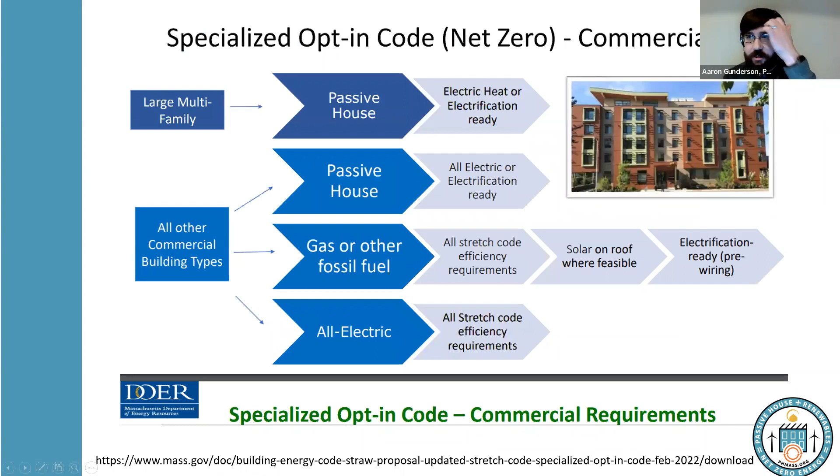This is just a slide from their straw proposal, a draft that they released, just showing you that the specialized opt-in code does feature passive house in a lot of places, but in a lot of ways it doesn't go as far as we want. So you can see some of those comments on our policy site.

Something else that just came out today that some of you may have received in your email box, just like I did, is that Mass Save launches their 1 to 4 unit incentive program. This is something we've also been talking about for a while that they were working on. We're really excited to see it actually here now. So those of you who have been here or are regulars at our meetings know that there's a passive house incentive program from Mass Save for a 5 unit or larger residential building.

So that's been in place now for about 3 years. Very, very successful driver of passive house projects in the larger multifamily sense. Now this program is geared toward 1 to 4 unit buildings, and it doesn't require passive house necessarily. What it does is require energy performance over a baseline or a certain HERS score.

You can see the details there, but we're just kind of learning about this as well and getting up to speed on it. They don't yet have this on their website that I could find to point you to, so it's only in that email. Hopefully they're going to get some stuff up soon, and we'll make those resources available as we get access to them. But so far, this is the info that they put out on it.

Something we do know is while this is kind of targeted at new buildings, retrofits can apply for these same incentives. That's a really good thing to keep in mind, especially with us prioritizing retrofitting our existing buildings to be either passive house or deep energy retrofits. So this program can work to incentivize those as well. We'll learn more about this and have more to say next month, through emails and on our website. But this is an exciting development here right now.

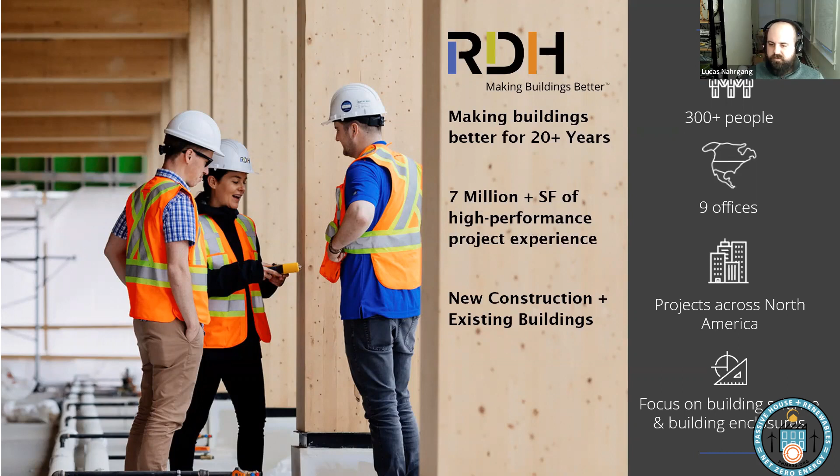I mainly operate on the new construction side of things, and every once in a while I'll dip my toe in the existing building side, and that's what we're here to talk about today.

So a little bit of background about the Ice House. It's located in Provincetown, Massachusetts. For those of you who have wandered the streets of Provincetown, you may have come across this building on Commercial Street. It's right smack dab on the ocean. It was constructed in 1907, and was actually one of the first cast-in-place concrete buildings on the Cape.

It was originally built as a cold storage facility to support the local fishing industry. There used to be a very large wharf off the back of it, where ships would come in and pack it full of ice. I think at one point in the building's history it also served as cranberry storage. That's a fun fact for everybody.

It's changed hands a bunch of times throughout its history, but the final time was in the 1980s, when it was purchased, and after a long drawn out legal battle, they gained approval to convert it to 23 condo units.

For some additional context, this building is located in the Historic District of Provincetown, which, as those of you who've worked in historic districts know, can definitely limit your ability to get creative and take the easy route in improving performance and repairing a building, or making any wholesale changes that alter its appearance.

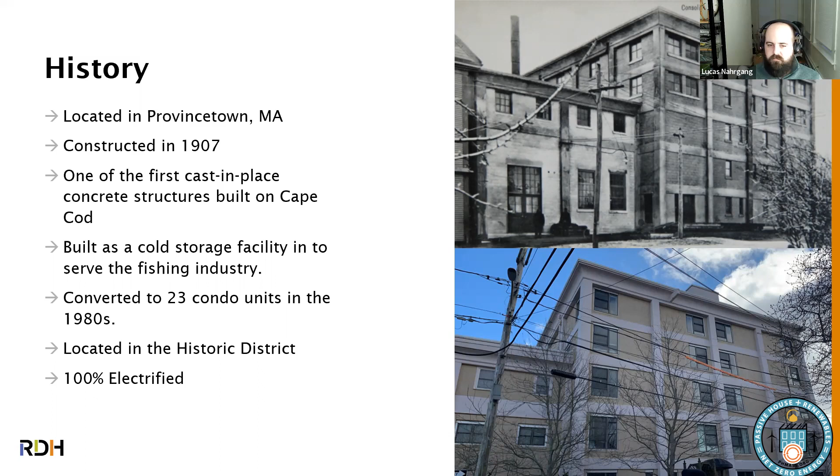Can you come take a look at it? Then as we got deeper into it, there were some opportunities afforded to us - the fact the building was electrified, some of the issues we found - to really take a stab at moving this building toward a high performance building, while also satisfying the mandate given to us by the ownership group.

So here's the beachside view of it. As I mentioned, it's about 40 feet from the water, so you're looking right out at the ocean here. It's a pretty spectacular view, but it also does get beat pretty badly with storms, which is another consideration this particular client had for us.

It was really refreshing to come across a group of homeowners so acutely aware of how things are changing, especially the long-term owners, seeing the storms that hit the building getting stronger, seeing the storm surges get higher. There's a lot of discussion about what to do with the building enclosure and assembly, mainly at the ground floor level, since it's actively in a floodplain.

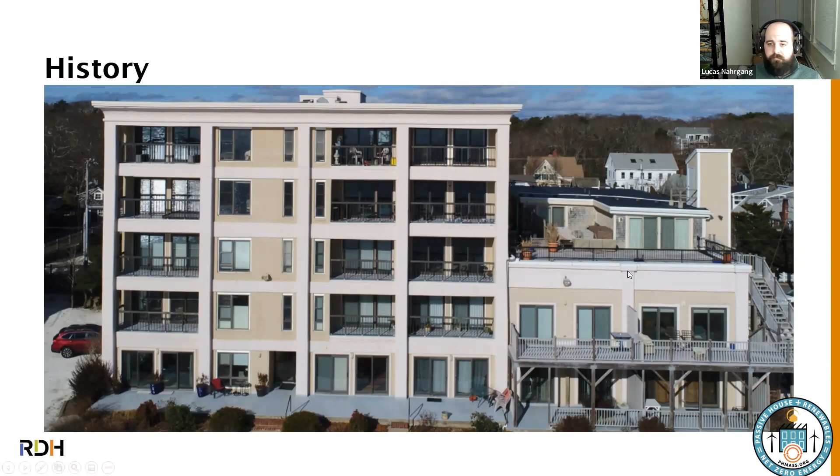So as I said, I came to Boston in 2018, and I think it was November of 2018, we were engaged by a structural engineer locally on the Cape to come take a look at this particular building. The main objectives of our condition assessment, which was focused on just the enclosure, was to understand the existing building's assemblies.

We looked at the performance of those assemblies when it comes to thermal performance, but also how it's managing water, how it's managing air - the general building science stuff we dig into. Further to that, we wanted to understand the occupant observations with respect to the enclosure - are they seeing condensation, do they get active leaks anywhere?

And then the result of that is to compile all of that data and really provide some high level recommendations to them about what they can do from a deferred maintenance standpoint, or from a longer term, larger project, larger renewal situation.

One of the unique things about this project - normally when we do a condition assessment and an occupant questionnaire, the condensation question is something people answer readily, because anytime you have a double pane window that's not thermally broken on a cold winter's day, especially morning, you're going to see that condensation.

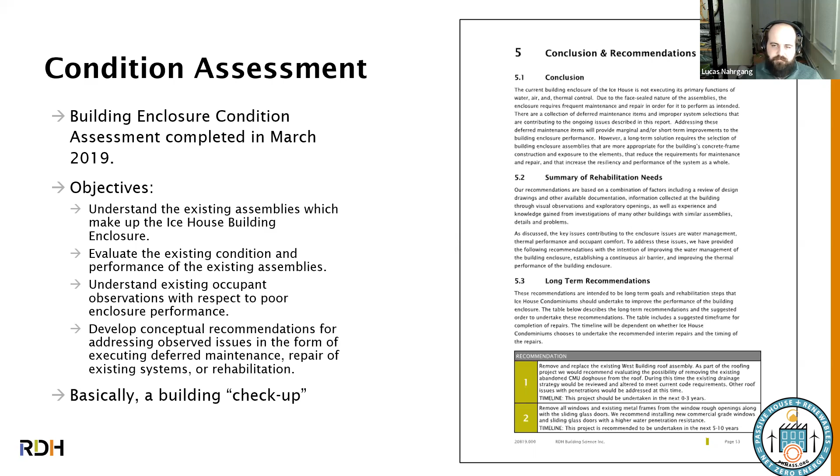So the general scope of this - we always approach things with a document review, an occupant survey, then interior and exterior walkthroughs. We actually did an IR drone scan on this particular project, and then did some roof, window, and interior openings.

In general, our scope included looking at the interior operating conditions - internal relative humidities, temperatures, that sort of thing - and looking at the walls, windows, sliding glass doors, in-swing doors, skylights, smoke vents, balconies, basically everything on the exterior enclosure.

What the takeaways were is that we have ongoing water intrusion in the building, whether it's noticed by the occupants or not. A lot of people have occupant comfort issues - it's very drafty, with concrete floors that are unfinished for the most part, exposed. If I go to the next slide, you'll see we've got exposed concrete elements, which are the superstructure.

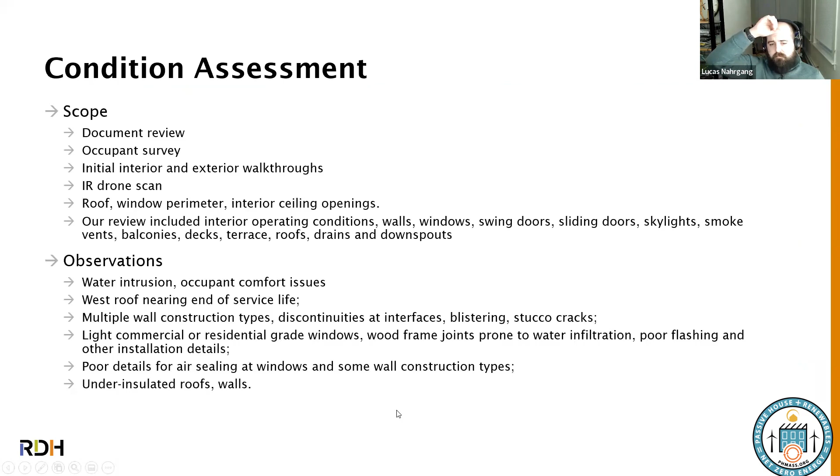Further to that, the west roof of the building - this is the west building here - the roof is near the end of its service life. It's been patched multiple times.

There's actually an interesting phenomenon that happens on the Cape where seagulls will carry seashells and fly up over buildings and drop the seashells onto the roof, trying to hit something hard to break it open and eat whatever is inside of it. Somebody who had never lived this close to the Atlantic Ocean - I thought the maintenance guy was pulling one over on me, I thought for sure he was lying, but apparently it's a thing.

The other thing - let's see, what else do we have? In general, the wall assemblies here are interesting. It's an infill wall that is a steel stud, 3.5-inch steel stud wall. It's got gyp on either side. Early 1980s Tyvek, which is a collector's item.

And then it has a drainage gap and a 3-inch wide brick masonry veneer, which is then parge coated over with stucco to seal up all possibilities for it to drain, and then coated with an elastomeric coating.

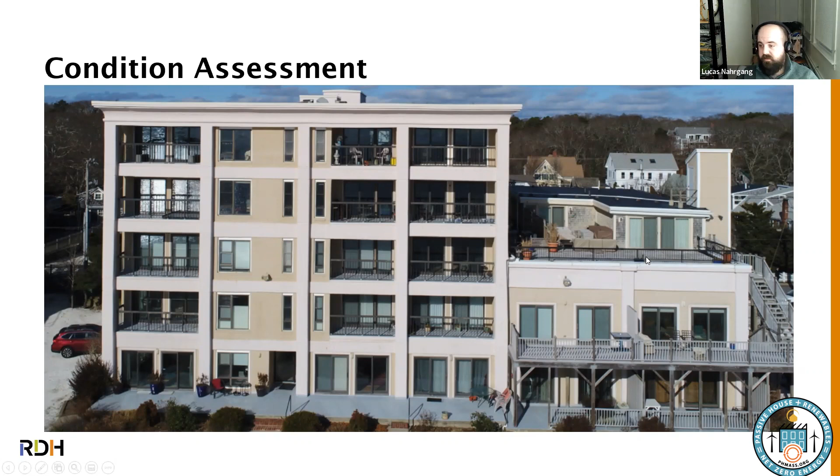And then some additional low-hanging fruit, like addressing your traffic coatings, looking into some further issues that we were unable to get to during our initial condition assessment, like the leaky skylight, and just continue in the interim before you replace your roof, to react to ongoing water intrusion issues from a reactive maintenance perspective.

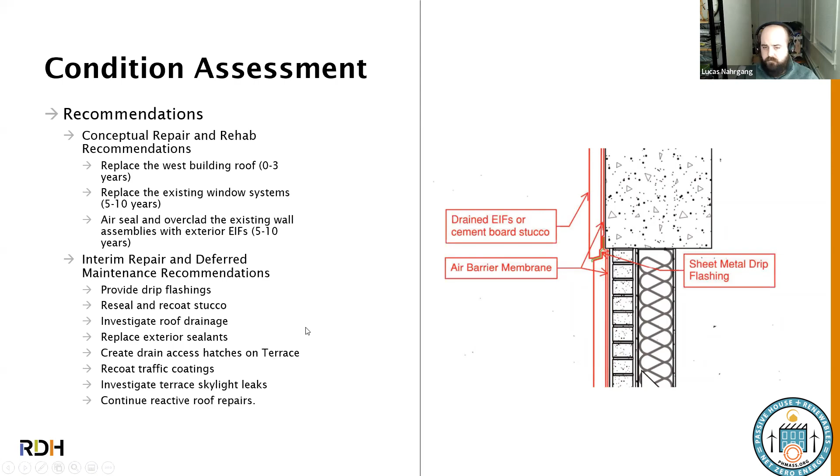So we made this presentation to the owners, walked them through the state of their building, and much to our surprise, they actually engaged us to do a holistic repair of the building. A lot of the time, a whole building rehabilitation comes with a pretty large price tag, but given the severity, or the chronic illnesses if you will, of this building, the ownership group elected to actually move forward and try to tackle this thing in a holistic approach.

Do we have any questions, Andrew, at this time, as I take a drink of my coffee? None in the chat so far, Luke. Okay.

So the scope of our rehabilitation project, typically what we'll do is go in with an additional level of investigation, which is us opening up more areas of the building to try and understand the underlying construction so that we can fully diagnose the issues and then design out from there. The next phase is the design and the analysis, and then implementation.

So this particular project, Andrew and I are actively working on it. We're actually just completing the design and hoping to go out to bid here in the next couple months. So this is a story that is only half told. Maybe we'll come back in a few months, and by months I mean a few years, and give everybody the rundown of how this thing ended up, and what lessons we also learned during construction of this rehabilitation project.

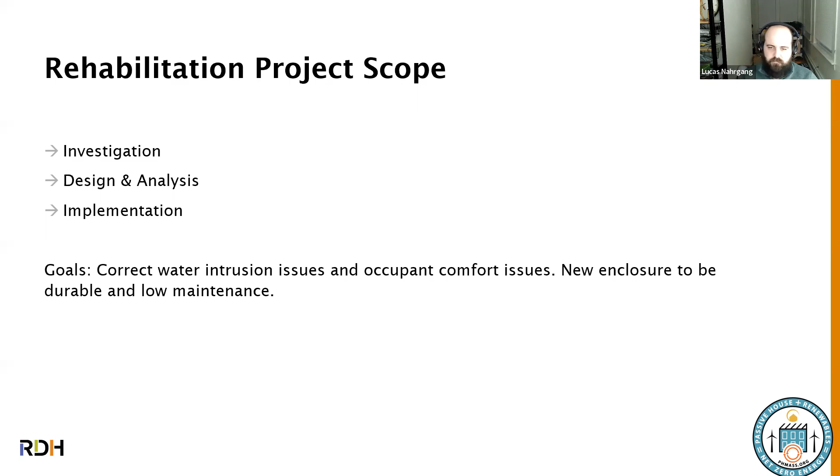So we did some additional investigation, which basically involved 12 exterior openings, and that was kind of what we had planned originally for the extent of the exterior openings. And based on what we actually found on the exterior openings, we needed to do 10 additional interior openings to really get an understanding of what was going on, and I'll touch on that on the next slide here.

So what we found in the walls was that the existing steel stud framing behind the masonry system was heavily corroded, with significant section loss in several locations, and if unaddressed, it could lead to a life safety issue, which, right off the bat, that was like, oh, there goes that initial plan of how we wanted to address this.

It was mainly concentrated around the windows, which we kind of suspected were leaking, and we didn't really get a lot of reports of water intrusion during our occupant survey. It was just that we were getting leaks at the perimeters and it was leaking down into the walls.

One of the interesting things about this building is that they poured a topping slab on top of the concrete floor. When I say topping slab, most people think it's a floating floor, maybe a half inch or two inches of gypcrete. But in some spots it was 9 inches deep.

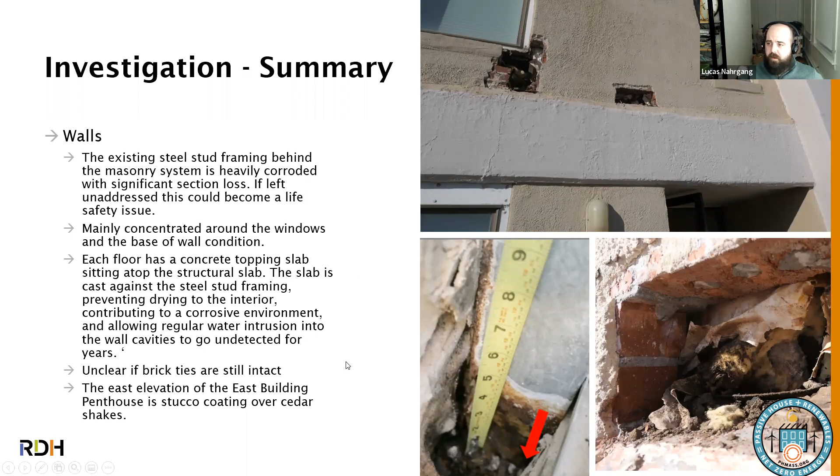Luke, we have one question here: were you dealing with a condo association or a management company?

We're dealing directly with the condo association, which for those who have done work with condos, or anybody living in a condo as part of a board, it's one thing to answer to one person, it's another thing to answer to a board—in this case it's only 23. This isn't actually that bad. It's when it's 230 that it's really hard. So, yeah, good question, I guess.

For our windows and doors, as I mentioned, there's an abandoned steel stud frame within it. In some cases, here's above a sliding glass door, here's your concrete spandrel beam. All they did was stack a bunch of 2x material, nail them together, and then fasten this sliding glass door's flange right to the face of it.

Not exactly the most structurally sound connection you could make. But it was also fastened at the sides, and it hasn't fallen out yet. Anyway, it all needs to be addressed.

The terrace wood deck was interesting—there's actually no insulation in the terrace deck, which is on the east building. Let me go back a couple slides. So the east building is this one here. There's concrete underneath, and on top of it there's a wood sleeper system and a plywood deck, and then it extends over.

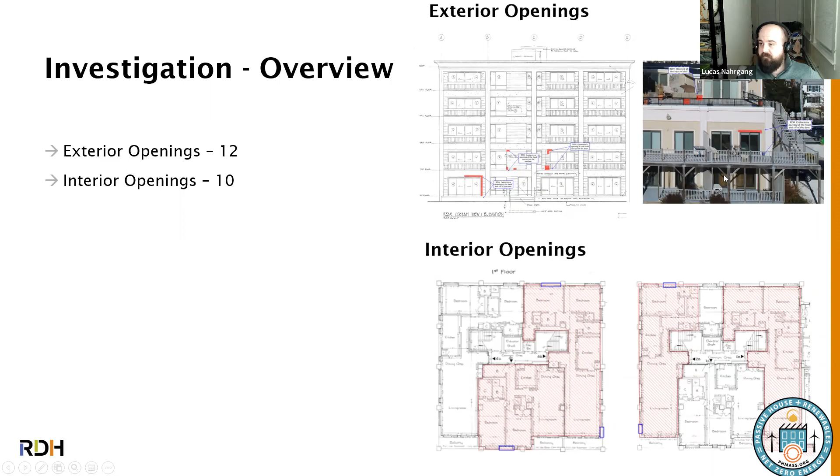We cut a hole in that plywood to look down and see the condition of the concrete, and noticed there's actually no compartmentalization between the sleepers that support this occupied area and this portion of the deck. So basically we've got the opportunity for air to pass freely from occupied to unoccupied space.

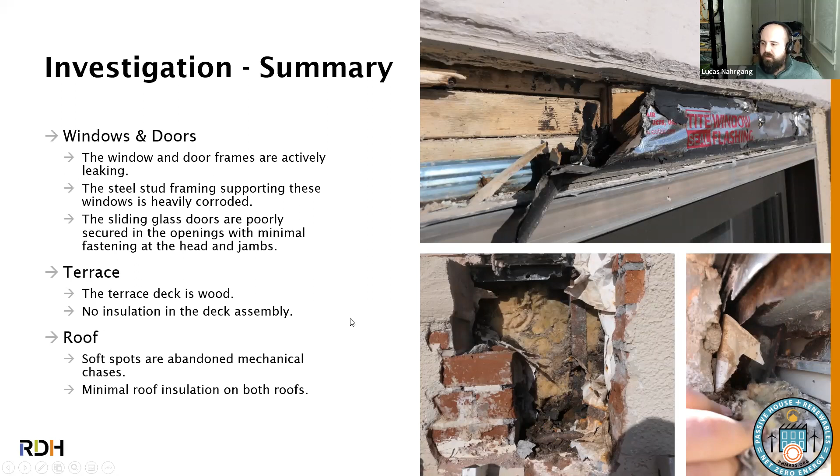And then there are some other areas of the roof that we investigated, and also found that we've got 2 inches of insulation on the roof at best. So needless to say, it was a little bit eye-opening.

One other question here: the steel studs rusted because of moisture infiltration through stucco and the brick? Yeah, I think from this diagram, let's pretend this is brick. We have water that was able to penetrate the brick and saturate it, and then there's just no place for that to go.

And our vapor drive in New England is primarily outwards, so we've got a large mass here that is covered with a couple layers of elastomeric coating, which further inhibits the drying potential. So we end up with all of this moisture trapped, which settles to the base of the wall and at the windows as well. You've got active leaks with bulk water coming in, so basically we've got this wet environment that is unable to dry actively, and it just sits there in the dampness and the corrosive environment of wet concrete, and deteriorates over time.

So how did this affect our general recommendations? Well, at this point we knew we had to do more demolition than we originally planned. Again, it's a condo association, and there are people who live here year round who have spent time decorating it. They don't want to have to change their interior finishes or remove things off their walls - they want as little disruption to their living space as possible. So they want us to stay and keep everything on the exterior.

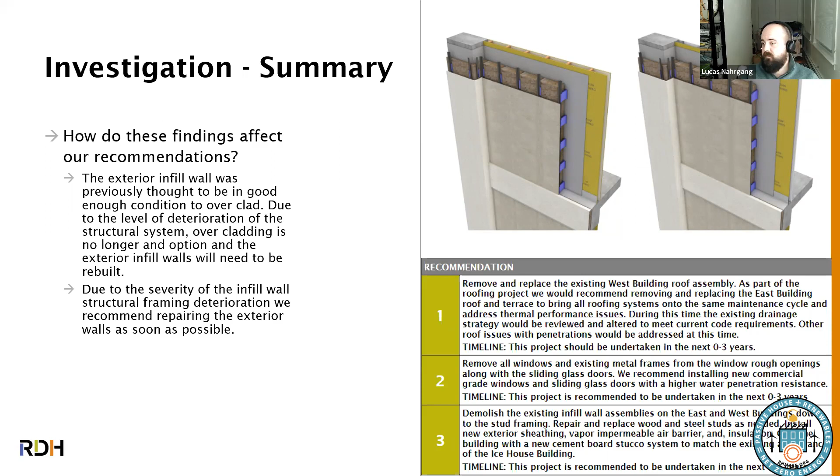So here's a breakdown of the enclosure design. We have 5/8 exterior gyp, 3.5-inch steel stud at 24 inches on center - that will probably change, we'll likely add a few more. We're not going to do any insulation within the wall cavity; we're going the ideal wall approach, so we'll put our air and vapor barrier out here, then do all exterior insulation since we have the depth to allow that. So, 6-inch Cascadia clips, and then a 5/8 inch cement board stucco.

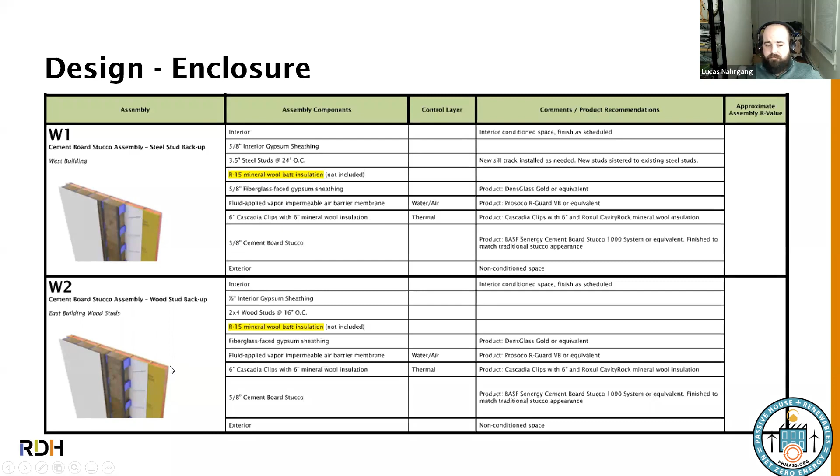Over the concrete, we'll do a similar approach, except we'll only be able to add 2 inches. There's a section of the building that has a CMU infill wall - it'll be treated the same as a steel stud wall.

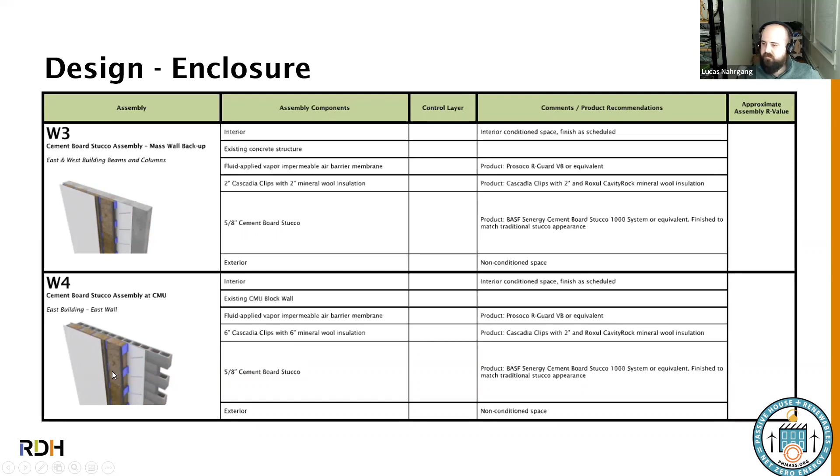On the roofs - the west building roof is a sloped roof, the structure is actually sloped. So we're going back with an R40 tapered insulation, tapered just to account for areas that need to be cricketed to the drains. Then we're using a 2-ply SBS roof to deal with the seagulls, basically, or at least that's the hope. When we talked with the owners, they said they want something low maintenance - that includes a membrane that can't be punctured by a seashell dropping from the sky. So if one membrane might get punctured, let's make it two.

We'll see if that gets value-engineered during the construction process, just given the lack of familiarity with 2-ply SBS here in the New England market. Everybody loves EPDM or single ply membranes, but this is my shameless plug for 2-ply SBS. I think it's great.

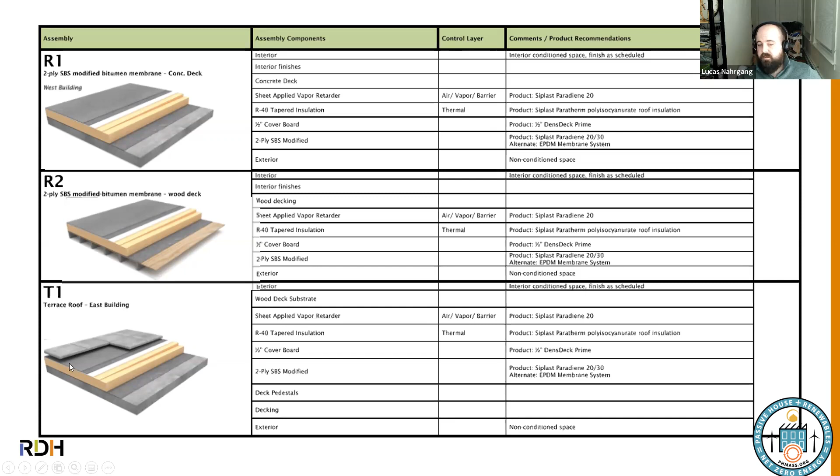And so then on the east building, it's actually a wood deck, so similar assembly. And then on the terrace, we're going to actually do the same assembly as well, and then put concrete pavers on top of that.

The glazing system selection was actually a really interesting process. Given the location of it, it actually requires us to meet hurricane resistance, so large and small missile impact testing.

And so we had originally planned to go with Cascadia as our basis of design from a thermal performance perspective, but we quickly found out that they don't have that testing, and so we were unable to use their windows.

And so we went in search of a window that could meet our desires from a performance perspective to meet the needs of the current climate, but also what the future climate is going to look like at this particular property, given its proximity to the ocean and the ever increasing severity of storms in the winter. And so we actually came across Wythe Windows out of New Jersey, and I think they presented or were part of the Passive House Massachusetts symposium recently.

So their window, we went down that path and had some conversations with them, and we had a conversation with the historic district about the fact that we're going to be using a UPVC window and trying to emulate the existing divided lights and how that looks. And they were somewhat amenable to it.

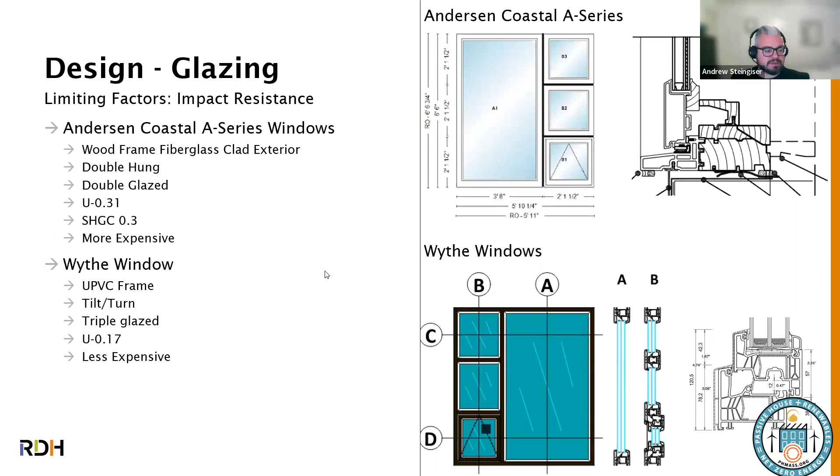Unfortunately. Okay. All right. On to what everybody was waiting for.

So as part of this, we never intended to go down the route of a deep energy retrofit. And then when we got there, the ownership group was kind of having cold feet about, hey, we're not really sure we want to, this seems like a lot of work. We're not really sure we want to do it all at once.

So we pulled together a brief potential energy savings analysis for them based on what their current assemblies are and what our proposed assemblies are. Based on the preliminary analysis, this is just a simple UA calculation. On a cold day, occupied year round, the reduction in heat loss to the building could be expected to be between 45 and 65%, which based on - we did this in 2020 - was 40 cents a square foot of annual savings for year round occupancy.

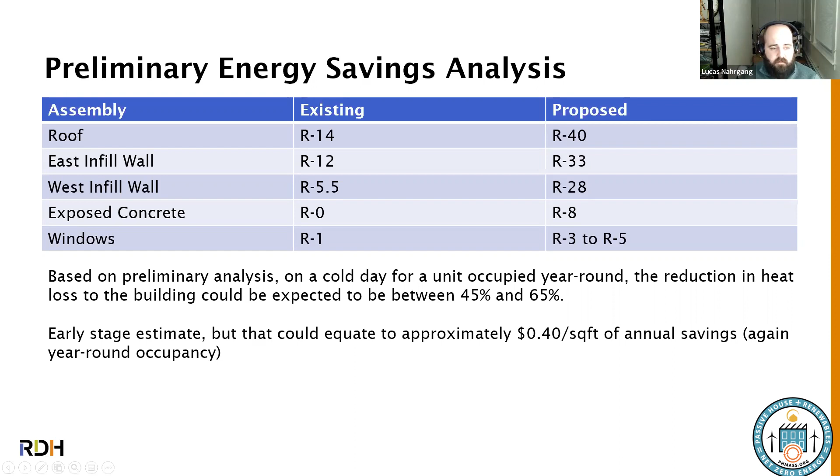I have no idea what that's like right now with current energy costs, or eventual energy costs as we continue down this path, with the current events.

So here's a brief breakdown of what our energy group did for me. Looking at what we currently have, this is an estimated air leakage loss. I would not be surprised if it was higher than that, based on some of the things we found as we got further along in the investigation.

You can kind of see here the reduction, there's quite a drastic reduction in the windows and doors, but then the real one is the exterior walls. Right now there's no exterior insulation. We've got 24 inches on center with R13 batt that's wet inside the wall cavities. So you look at the derating from a steel stud on that particular assembly, and then you have uninsulated concrete elements—it's a drastic change. When we presented this to them, they said, okay, maybe this isn't the worst thing in the world, but it's still going to cost a lot.

Any questions on that? Okay, one question there, Luke. You said benchmark air leakage was estimated—was testing not able to be performed?

I would have loved to be able to test it, but what it all comes down to is getting paid to do the work. Like I said, I'll talk a little bit more about this later in the presentation, about the lessons learned and where we ended up, and knowing what we know now, what we would have done differently.

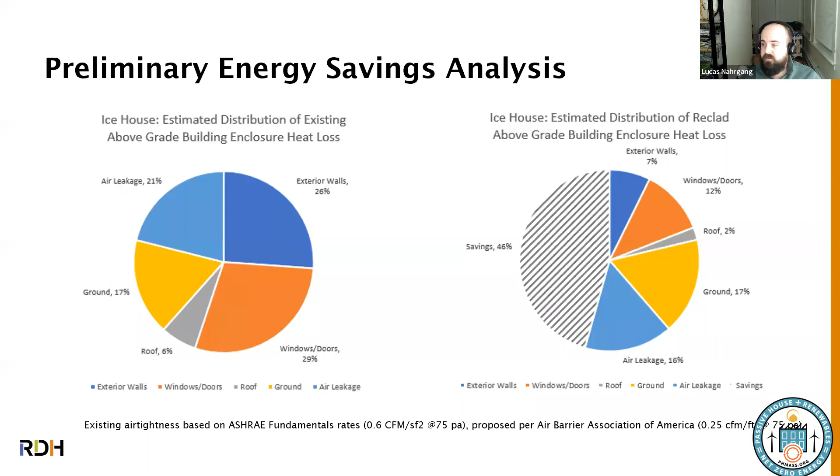So, great question, and by comparison, we do have projects that start off intentionally pursuing a deep energy retrofit roadmap, where we look at sequencing a combination of carbon reduction measures with different associated rough order of magnitude costs. In that process, we often do whole building air tightness testing to establish a benchmark.

Again, like Luke was saying, that wasn't the starting point for this project. It was initially a bit of enclosure work, fixing leaks, which is something architects have also traditionally done a lot of. But yeah, some projects we do specifically include that from the beginning, when that is our scope of work.

Mm-hmm. And so as we started to get into this, recognizing that this building's current ventilation strategy relies on passive air leakage through fenestration systems, walls, that sort of thing, we're looking at this and saying, okay, well, we're going to be touching the enclosure, we're going to be making it tighter. It relies on passive air leakage for ventilation, and now we're going to be greatly reducing that passive air leakage.

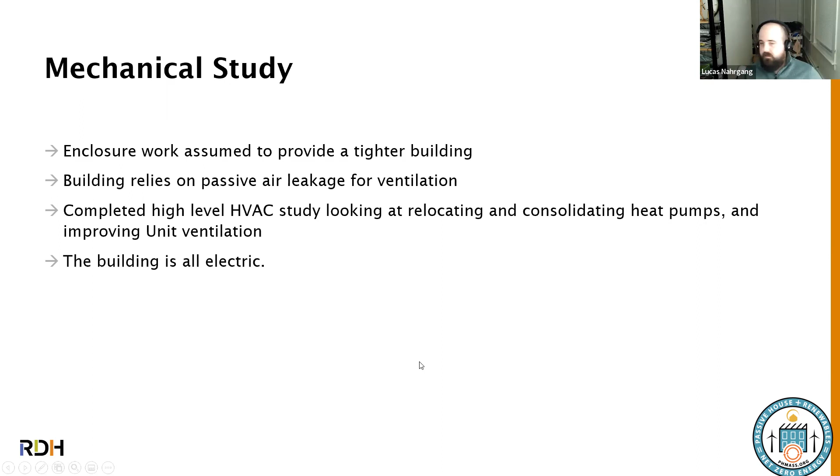So we recommended completing a mechanical study, or at least something high level, to evaluate how we could potentially introduce controlled ventilation within the building. And as I said earlier, the building is all electric. In the interest of time, and this also is not my area of expertise, I will gloss over this, but if we have any in-depth questions about it, we can definitely come back to it.

So we've got a bunch of heat pumps on the property right now, and the general issue is that some are located in the parking lot, some on one roof, on another roof, one beside - they're kind of all over the place, and maintaining those particular units and also replacing them is becoming more costly and difficult to manage.

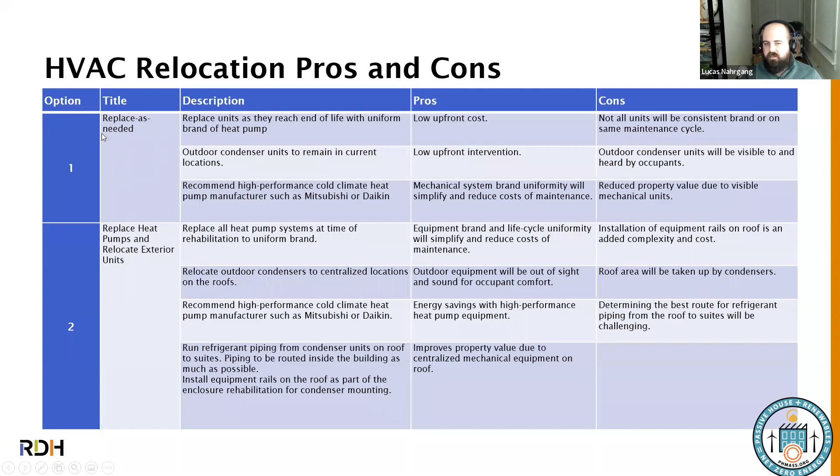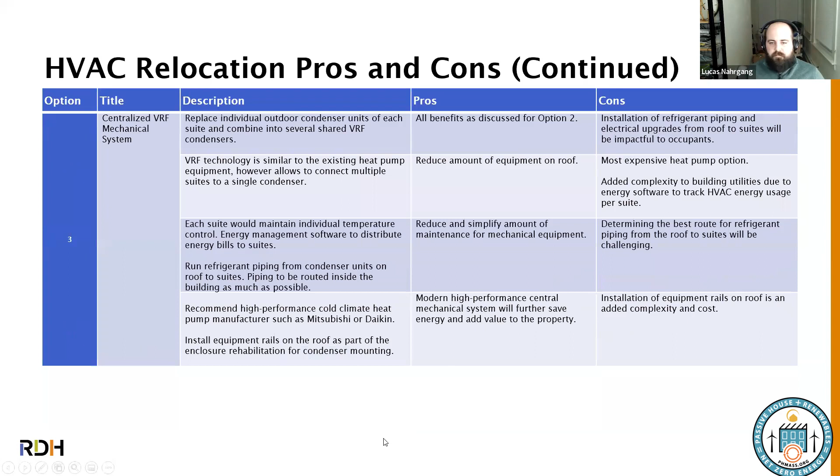So there was some discussion about, hey, can you look at and see what it would cost for us to just replace them all and put them all up on the roof? So we looked at that and said, okay, here's one option. And then we left another option as replace as needed. And then we also looked at a third one to do a centralized VRF mechanical system as well. And so we pitched all that to them and gave them some pricing.

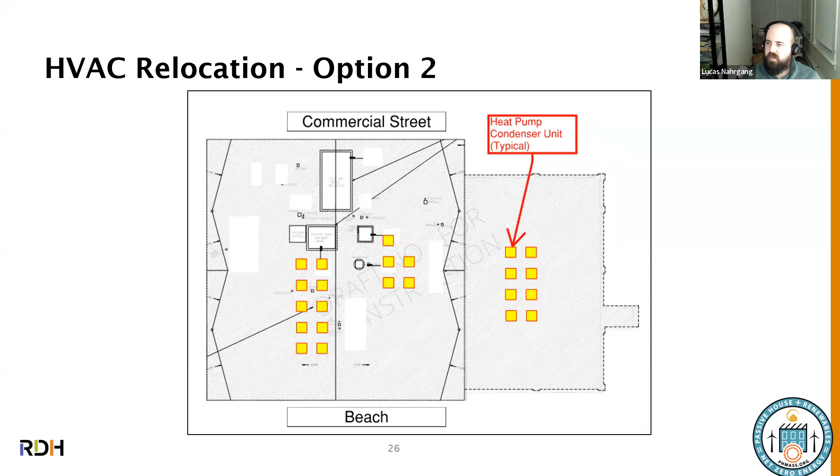And at the end of the day, to do anything related to the HVAC, including ventilation, which I'll get to next, was just something that proved to be too costly for them to add to the project. And they ultimately decided that they were going to defer that for another phase of their evolution on the building. So ventilation options were...

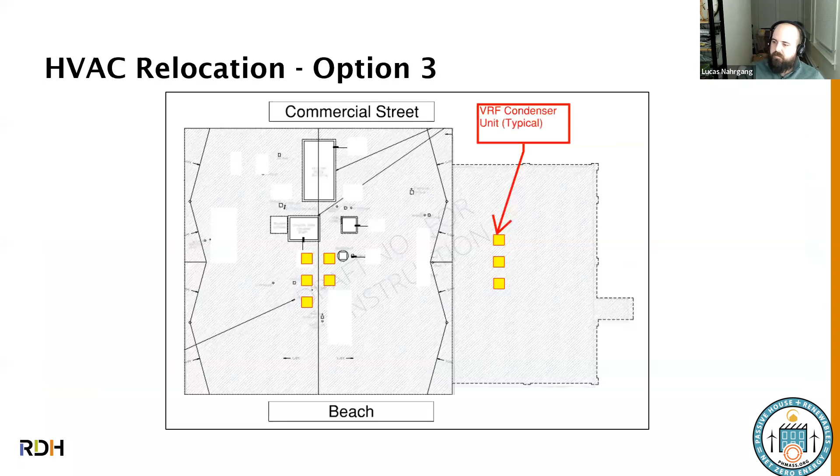Continue relying on passive air leakage, which is essentially engineer speak for do nothing. Then the other option, where there was an existing mechanical chase in the corridor that was never actually utilized, that was an opportunity for us to potentially pressurize that corridor and provide fresh air via that mechanism. And then on the east building, we would still have to either rely on passive air leakage...

Or go the route of introducing either distributed ventilation systems and heat recovery into those units. And so that was kind of the third option, was to say, let's try and add an ERV to each unit. Most of the heat pumps, it's all forced air, that's all electric resistance heated, or it's cooled as well.

And so there was the opportunity that most of those were actually on the exterior walls. So potentially adding an ERV at that exterior wall - there was kind of that opportunity there that could have been potentially a low cost solution.

So, lessons learned. Working with an existing building is full of surprises. So you've got to approach these projects and be really flexible, and recognize that it's not going to go according to plan, but also look for opportunities.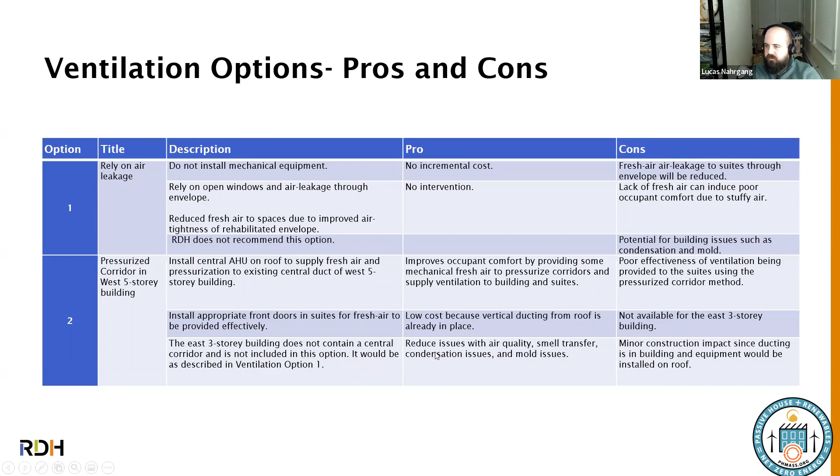But we talked about reducing issues with air quality, smell transfer, condensation issues, mold. So we did talk to them about the impacts that it does have. At the end of the day, it was...

Running, they were out of the bandwidth to climb that last hill. Sitting on it from the professional side, you look at it and you're like, come on, we're almost there. And then, if I lived in that condo, which I will never live in a condo because I've spent enough time working on condos...

If that was me and somebody came to me and said, hey, I need you to spend $220,000 on your house to fix it, I'd be like, all right, when do I sell?

But I think the other flip side of it is trying to come at it from a property value perspective, and what it's going to do for their property value. The other thing we started to try to have the conversation with them about is that these decisions we're trying to make on your behalf, we're not talking about trying to deal with resisting the current elements in the climate that you currently live in. We're trying to talk about the climate 20 years from now.

Maybe you did come out to the Cape for Thanksgiving this year, and then we had a nor'easter come through and you lost power, or maybe it was a major event and you couldn't go anywhere. You're not going to freeze to death when the power goes out in this building right now - or right now, you will. You're going to freeze to death.